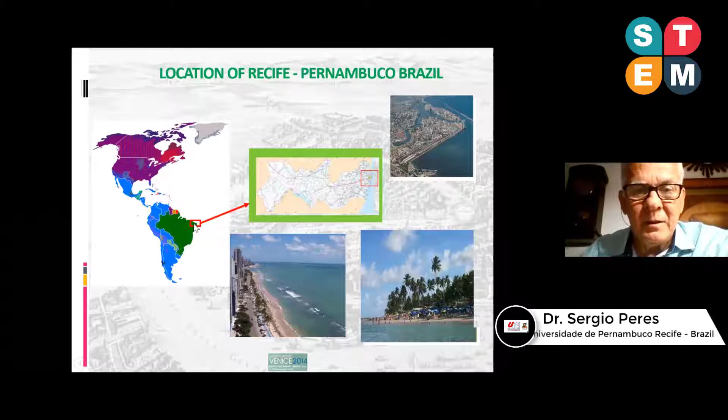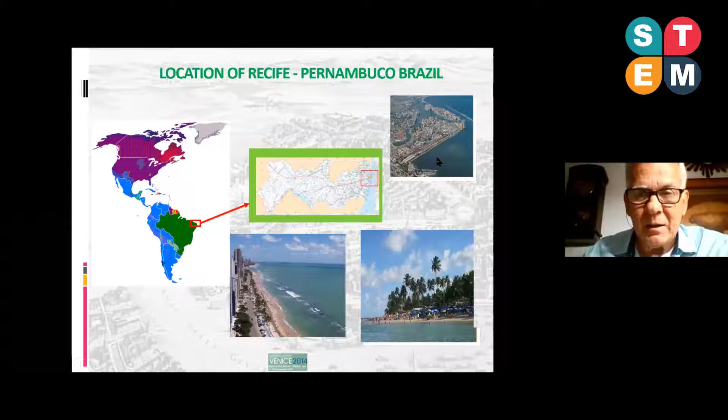All right, let's start then. I'm from Recife in Brazil, just so you know where I live. That's the Americas, and this point here is the Brazilian tip, where I live, in a state called Pernambuco, and that's my city. The city was colonized by the Dutch for 24 years, and after the Dutch left Recife following a war with the Portuguese, they went to New York and settled there. New York was founded after Recife, through Recife, I would say. So that's our city and our beaches, just for you to know.

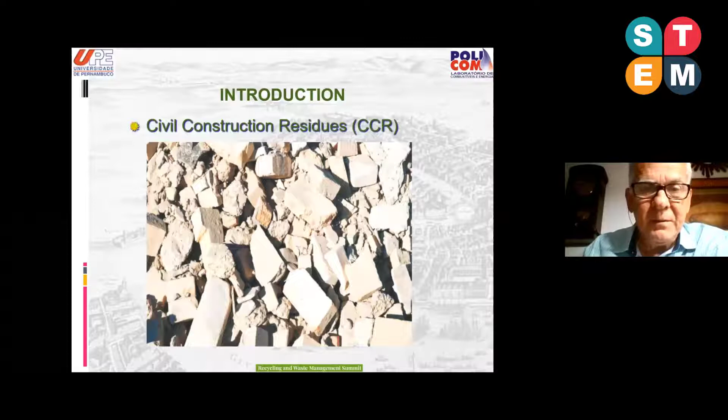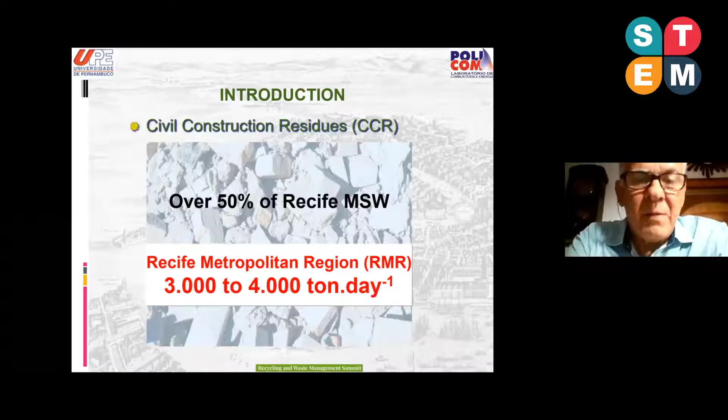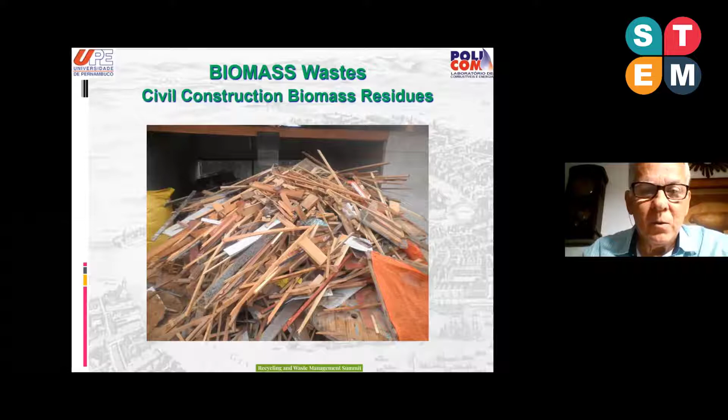Here we have the civil construction residues in Brazil. Over 50% of Recife municipal solid waste comes from civil construction residues. In the metropolitan area, there are about 3,000 to 4,000 tons a day, and part of it is wood. The waste wood accounts for 6% of all civil construction residues. In Recife, that would be around 200 tons a day, and it cannot be reused because it's broken or damaged and cannot be used in civil construction anymore.

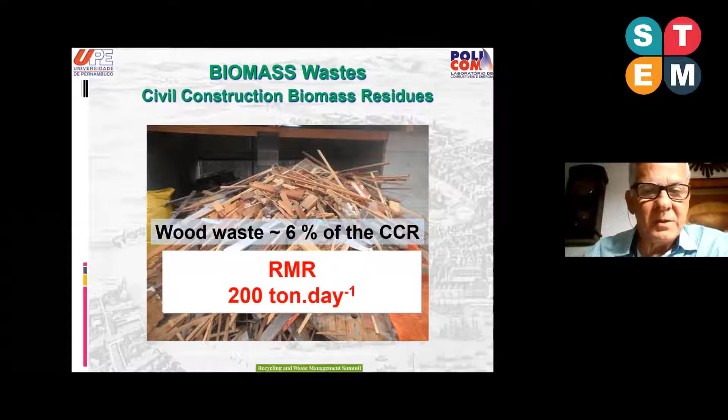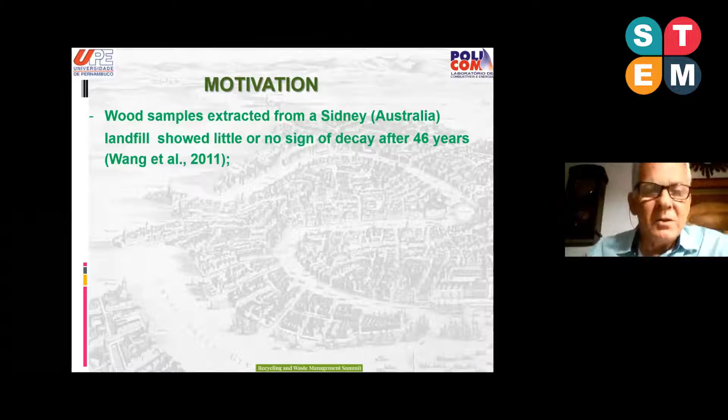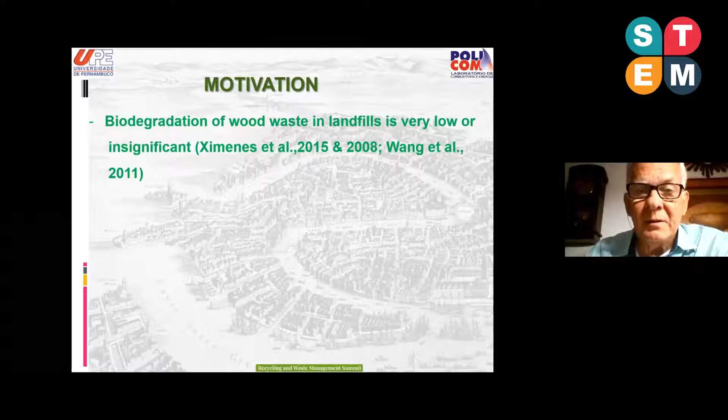So what do they do with that? In Brazil, most civil construction wood waste is dumped in landfills or open dumps. One problem is that wood samples extracted from a Sydney, Australia landfill showed little or no sign of decay after 46 years. The biodegradation of wood waste in landfills is very low or insignificant, because lignin, one of the main constituents of the cell wall, prevents microbial attack in the cell wall composition.

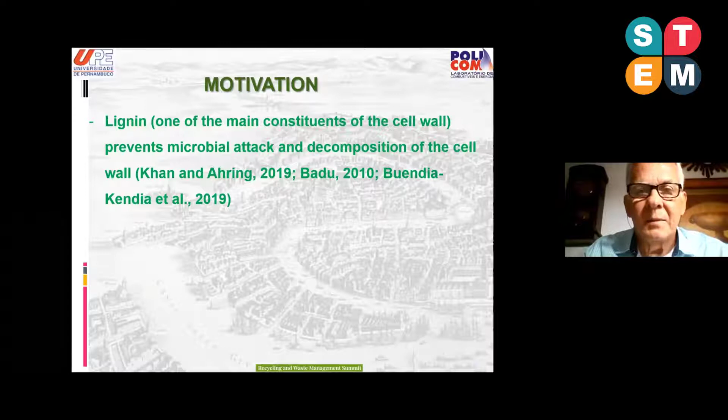And for this case, the amount of wood waste in landfills is very, very high, and that reduces the lifetime of the landfill. For this reason, environmentally friendly technological routes ought to be investigated to use waste wood as feedstock.

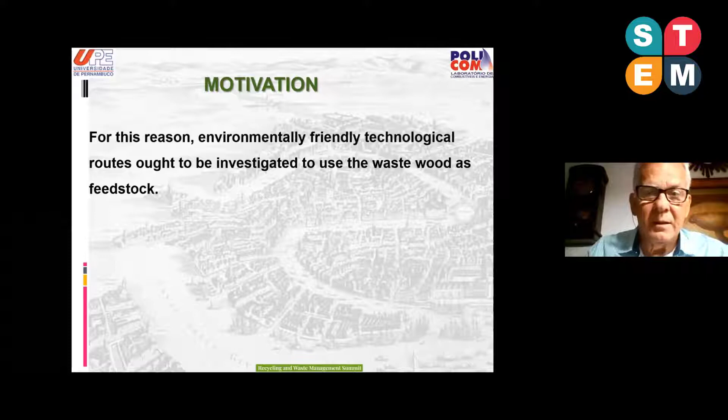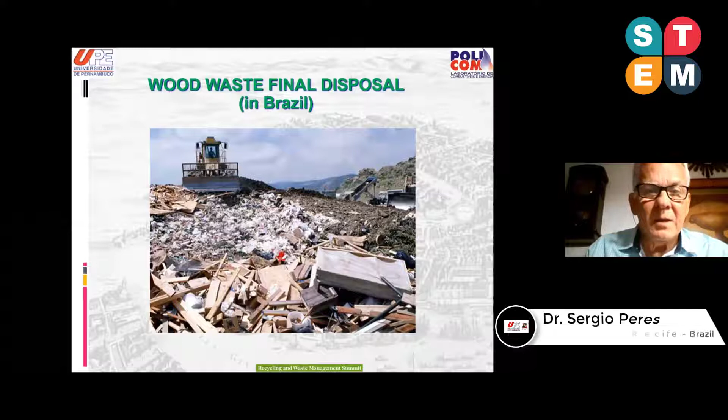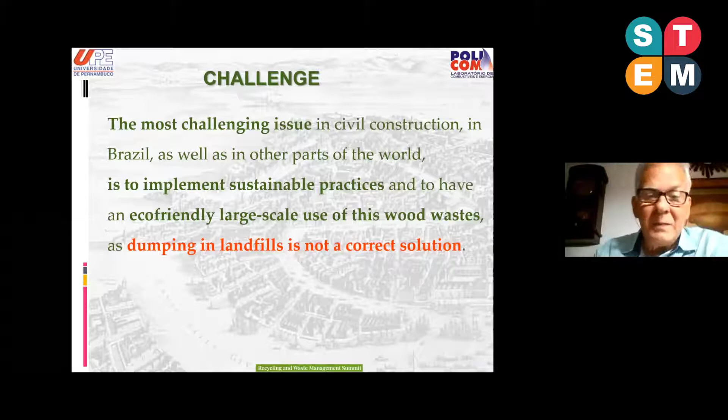So that's the wood waste final disposal in Brazil. As you can see, some is left in open dumps at construction sites, some is left in the streets, and some goes to sanitary landfill. That's a burden because it cannot degrade in due time. So the most challenging issue in civil construction in Brazil, as well as in other parts of the world, is to implement sustainable practices and an eco-friendly, large-scale use of wood waste, as we know dumping in landfills is not a correct solution.

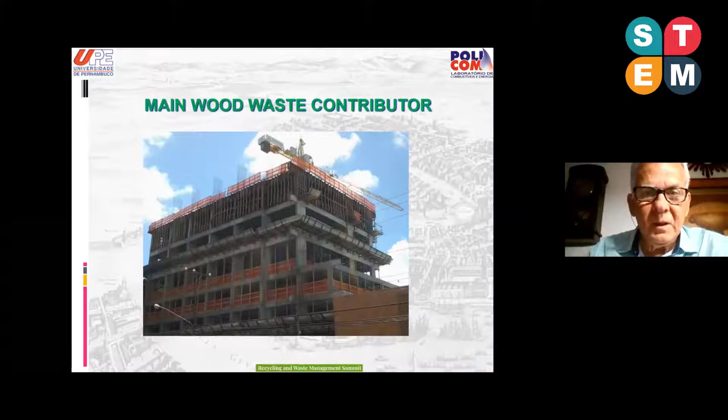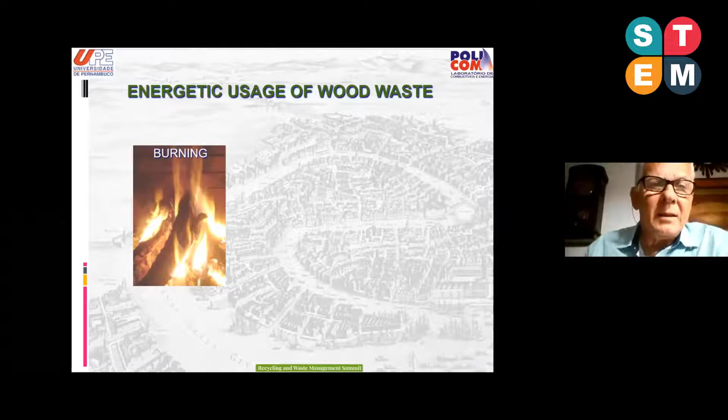In our research, we collect the wood waste from residential buildings - I'll show the details in a few minutes. Then there's the energetic use of wood waste, which can be combustion or burning, used in bakeries, home heating, boilers, steam generators, or red tile factories. So there's a lot of potential use, but some of it cannot be sold, and there's currently no recycling or energetic use of the wood waste.

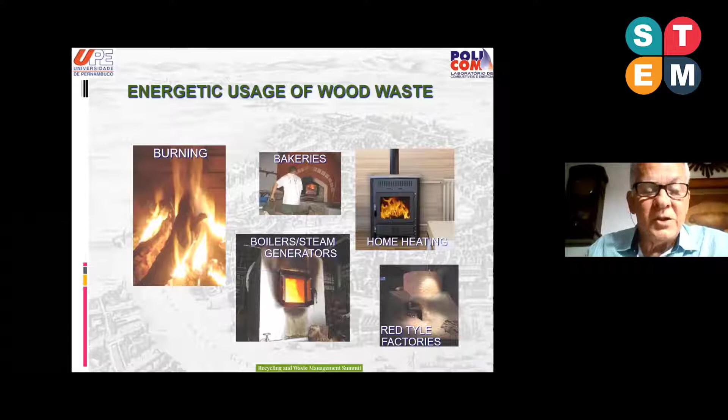So the objectives of this work are to obtain data on the wood waste composition and availability in a construction site, to determine the physical, chemical, and energetic characteristics of the wood waste, to evaluate its usage as solid fuel for direct burning, and the use of wood waste as feedstock for gaseous fuel production using a bench-scale gasifier and a 20 kilowatt downdraft gasifier connected to an adapted Otto cycle motor generator.

In this case here, we are just going to show the results of the bench-scale gasifier, and also show, if it were used as a solid fuel, what would be the amount of energy that can be extracted from the wood waste.

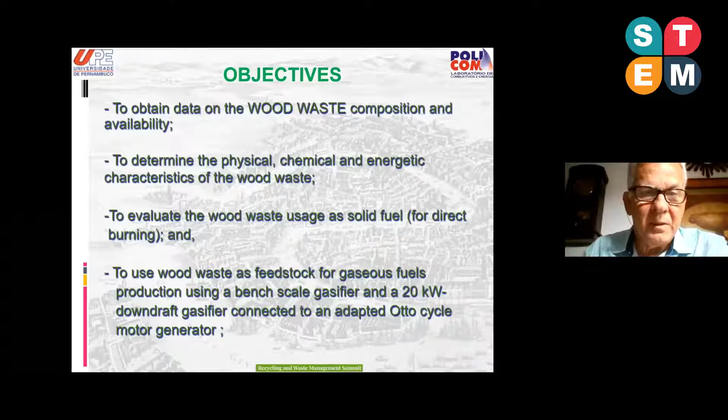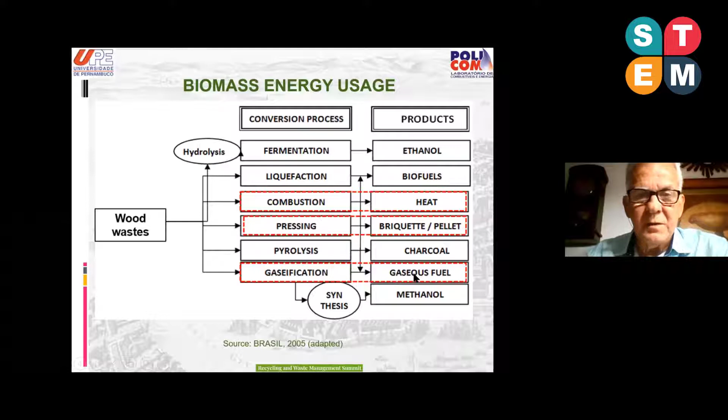So we're going to be talking about combustion - you have pellets and briquettes - but our approach is in gasification to produce gaseous fuels, which we're going to show you now. The three steps used were: sampling and preparation, characterization of the samples, and then production and characterization of the gaseous fuels.

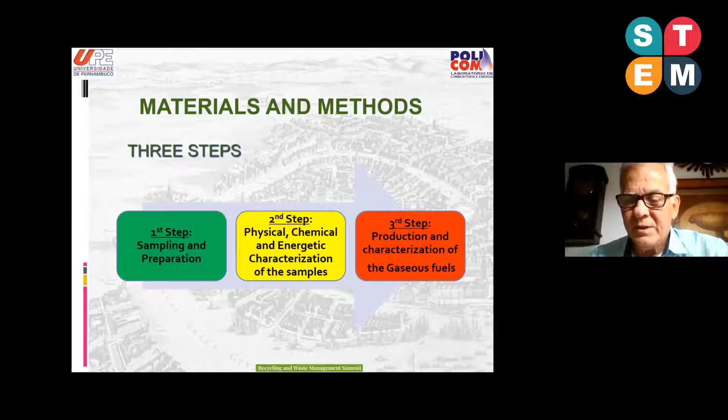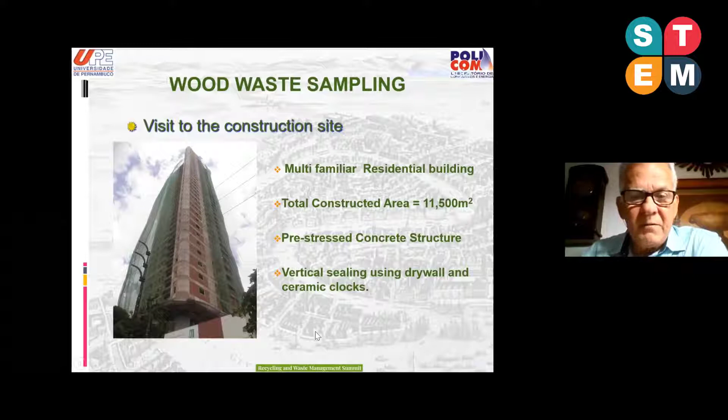The wood waste sampling was done at a construction site using multi-family residential buildings, which is very common here in Recife, Brazil. The total construction area was 11,500 square meters, using pre-stressed concrete structure, with vertical sealing using drywall and ceramic blocks.

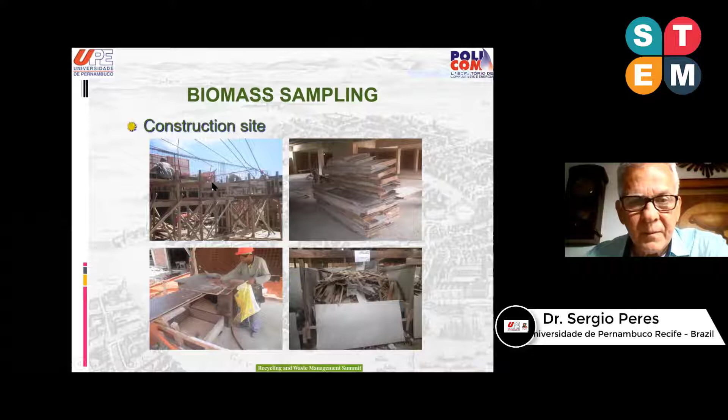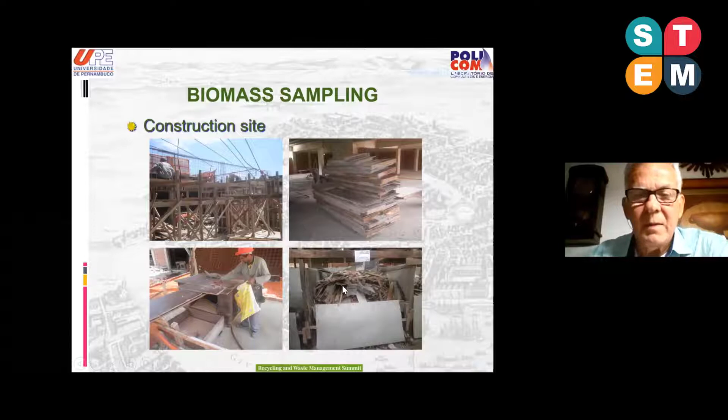That's the construction site in various phases of construction, and that's where they use the wood. Some of it can no longer be used, so you can see here plywood, and that's the residues - the waste management you can have at construction sites.

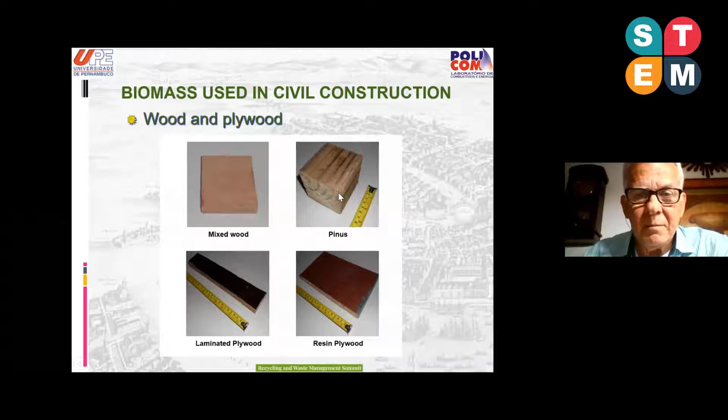When we got the samples and did the gravimetric analysis, we found four main types of wood used in construction here in Brazil: mixed wood, which is made of many types of wood, pinus, laminated plywood, and resin plywood.

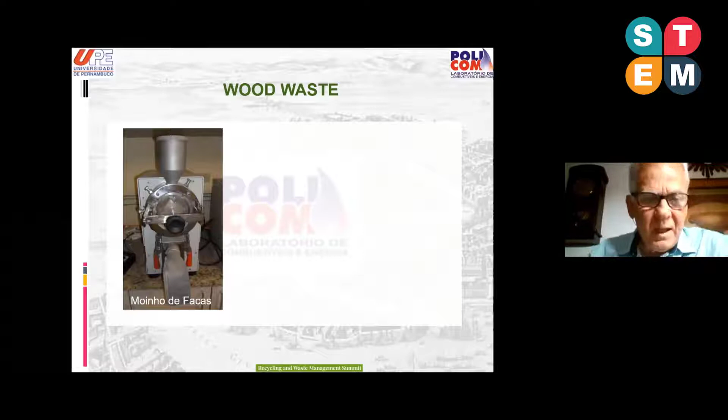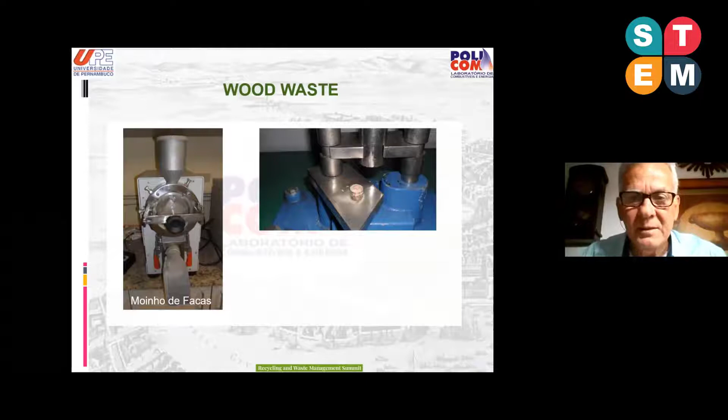So here's how you prepare the samples. You have a knife mill, and then you get the sawdust and prepare the pellets. The pellets can be used to analyze in our instruments in the lab.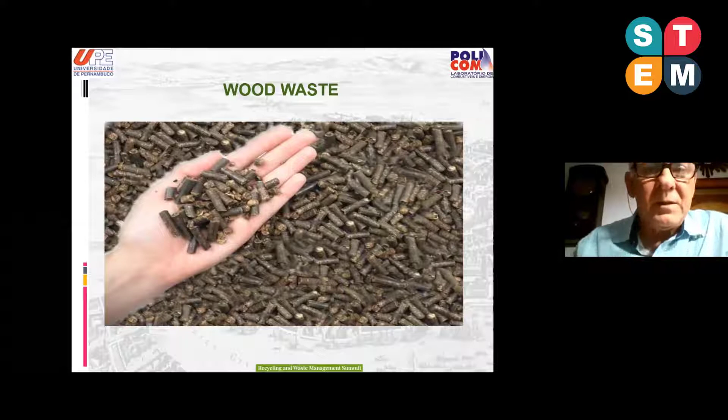That's our small pelletizer - that's the wood waste that could be in form of pellets. Instead of having the big plywood and timbers, you reduce that and produce this kind of pellet that can be sold already as solid fuel for heating, for bakeries, and all this stuff as solid wood. That's how you use it for our experiments.

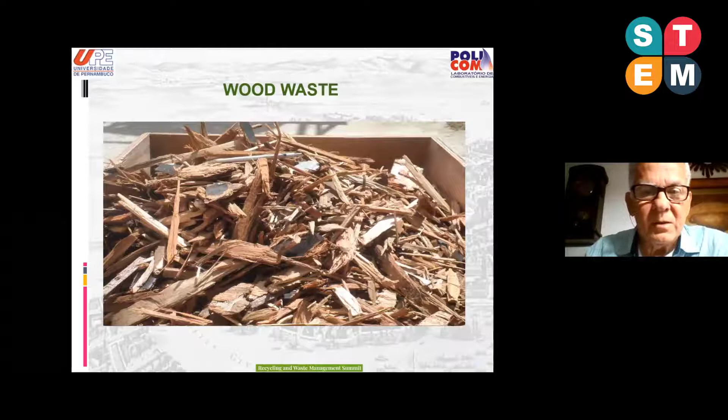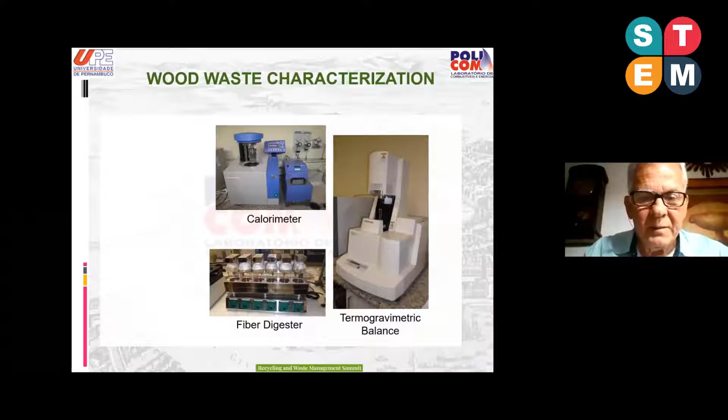So that's the wood waste - it's shipped here, goes through the mill, and then in the lab we have the instruments that do all the analysis: a calorimeter, a thermogravimetric balance for the proximate analysis, digestion to get the biomass composition, and elemental analysis to verify the composition of carbon, hydrogen, oxygen, nitrogen, and sulfur.

And that's the GC, the gas chromatograph, used to analyze the composition of the gases that come out from the gasifier. That's a downdraft gasifier in pilot scale, a 20 kilowatt unit, and that's the bench scale gasifier we use in the lab - the one we're going to show results from in our research.

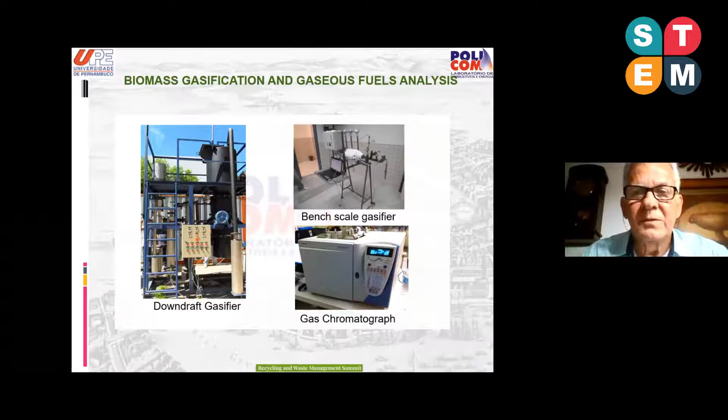So that's the bench scale gasifier. There's a gasifier tube made of stainless steel, and here we have the heater. And here we have the thermocouples in order to verify the temperature inside the reactor. Here you have the valve.

That valve there, you pass nitrogen first to have an inert atmosphere. They have all these valves here, and a pressure gauge. With this pressure gauge you can verify the temperature and pressure achieved inside the chamber, and use that to control temperature, pressure, and residence time.

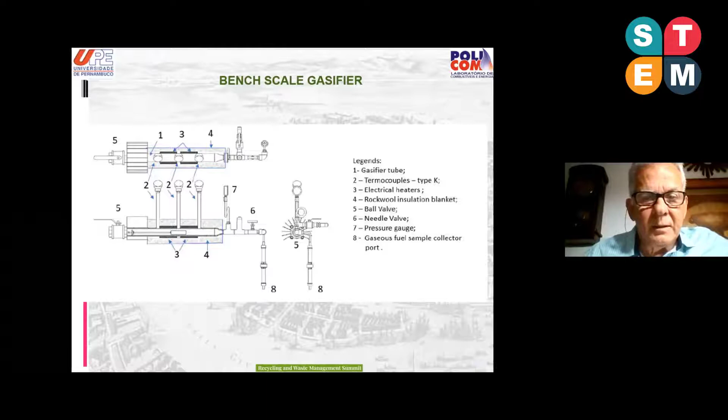So when you open the gate here, you get this sampler collector port, and after that the gases go to be analyzed in the GC.

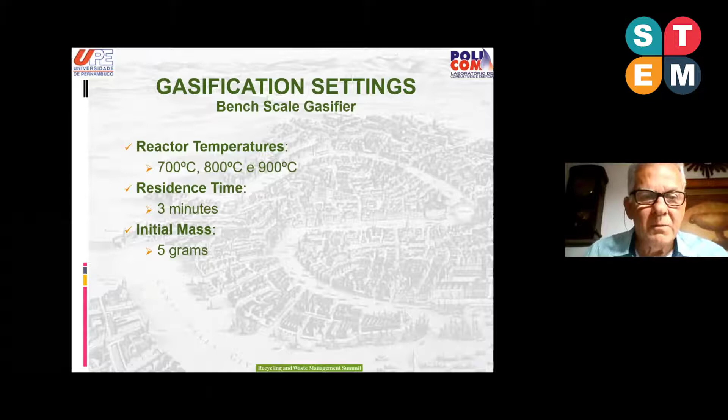For the bench scale gasifier, the analysis was done at temperatures of 700, 800, and 900 degrees Celsius. The residence time was 3 minutes, though we tested different residence times from 1 to 6 minutes and the results after 3 minutes were the same, so we established 3 minutes as the standard. The initial sample mass used was 5 grams.

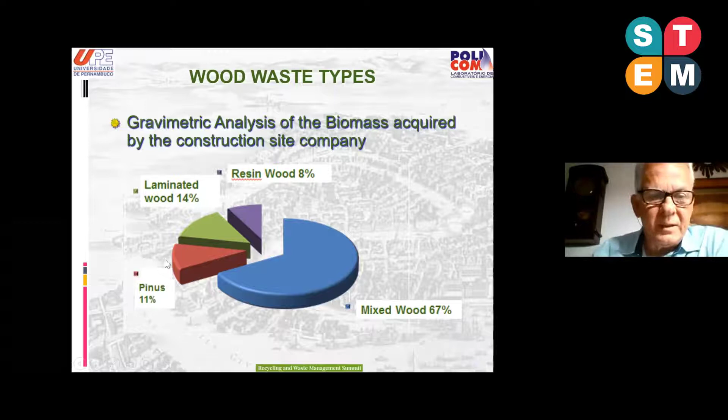For results and discussion: in civil construction in Brazil, the types of wood used were mixed wood at 67% of purchases, laminated wood 14%, pinus 11%, and resin wood 8%. From the total amount purchased, it was 164 tons - that's the percentage of each type bought for the construction of the residential building.

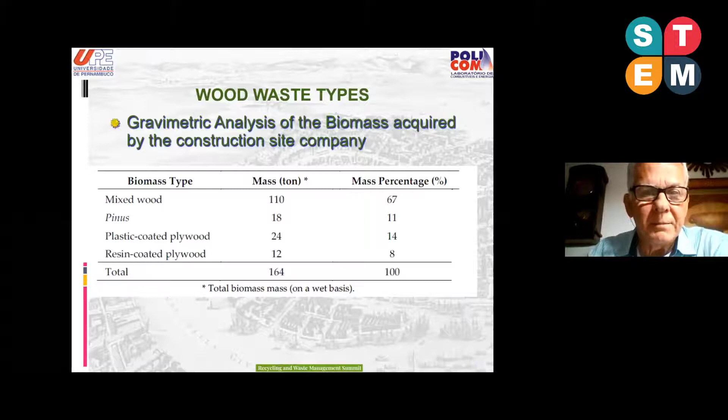The proximate analysis has shown these results: density for mixed wood was 800 kilograms per cubic meter, pinus 414, plastic coated plywood 519, and resin coated 521. Moisture content was very low, 7.6 to 10%. Ash content was very good.

That experiment was done at 600 degrees Celsius using the muffle method, and also using the thermogravimetric balance to get results. You can see that the amount of ash was very low, and the weighted average considering the percentage of each wood type was 1.29 - very low for gasification.

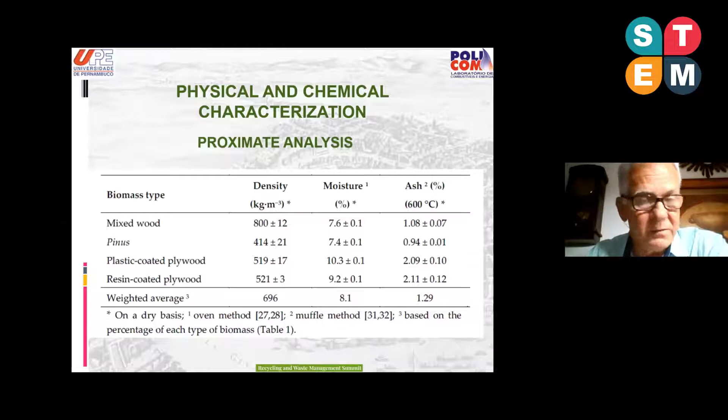The ultimate analysis shows that the composition of the biomass was almost the same, with very little variation. The weighted average was 46.6 for carbon, 6.58 for hydrogen, 45.34 for oxygen, 0.17 for nitrogen, and 0.18 for sulfur.

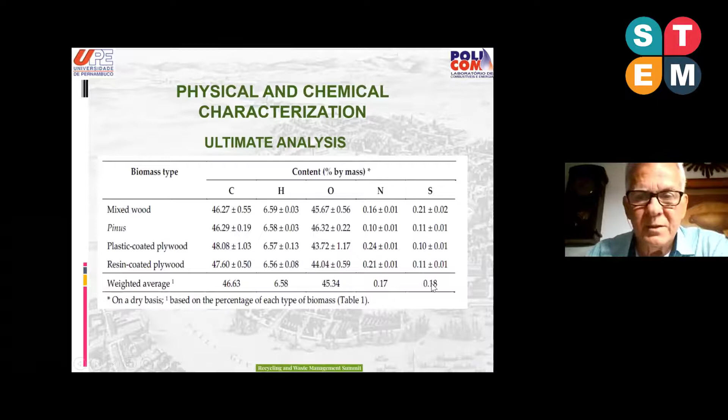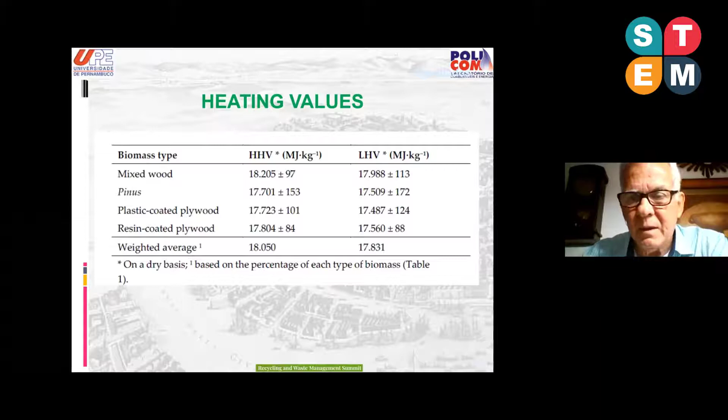That's very small because sulfur has to be under 1%. The heating values were very high. The low heating value was in the range of 17 megajoules per kilo, and the average was 17.8, on a dry basis.

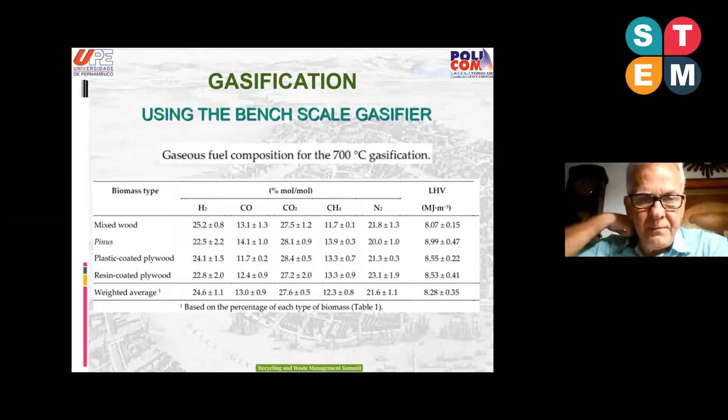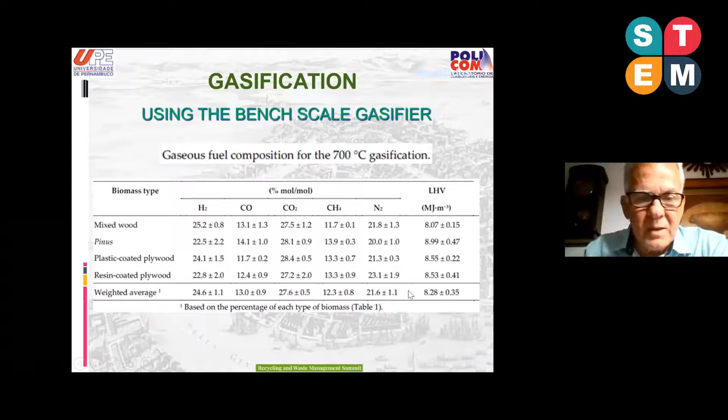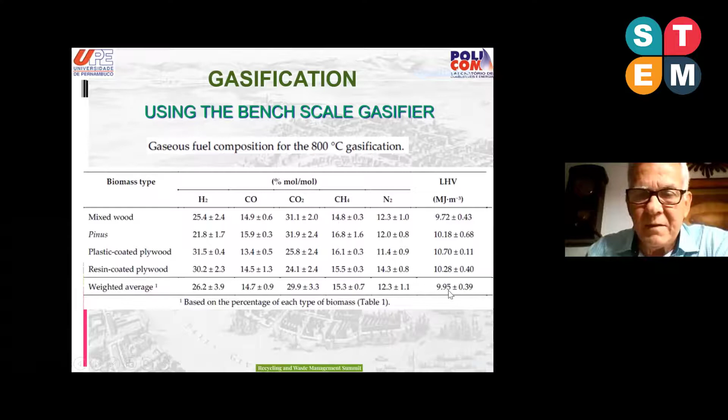They started having a better low heating value, varying from 9.72 to 10.7, with an average of 9.95. For 900, the average was 10.14. The low heating value varied almost to 10, in the 10 megajoules per cubic meter range.

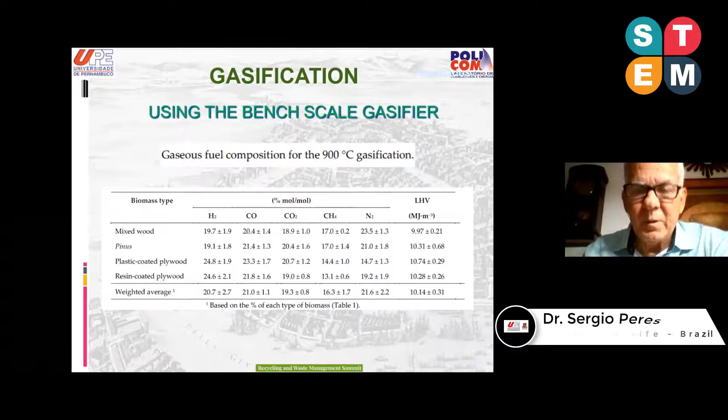Another thing you could verify here was the effect of gasification temperature on the low heating values for gaseous fuels. You get the composition and heating value for each gas, and we weighted them. From 700, that was in the 8 megajoules range. When we increased the temperature to 800 and 900, there was a very good improvement.

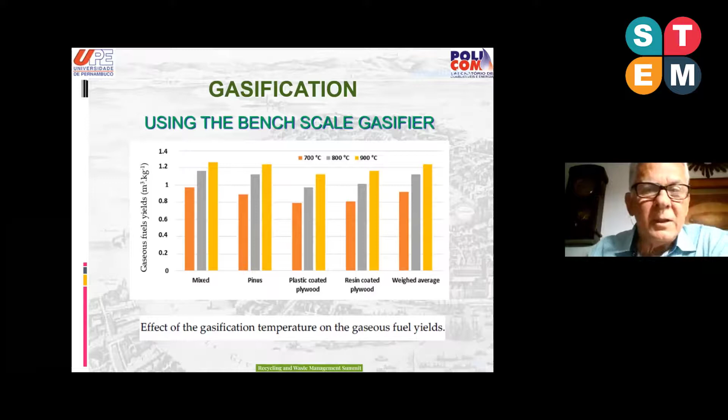Another thing you have to take into account is the gas yield, in cubic meters per kilo. You could verify that the yield increased as the temperature increased. And when we multiply the yield by the heating value, you can get the energy that can come out from the gasification process.

The total energy produced, in megajoules per kilo, was much higher at 900 than with the others. Even though the low heating value was about the same for 800 and 900, the production of gases was higher, which makes the 900 degree experiments more attractive than 800 for all of them.

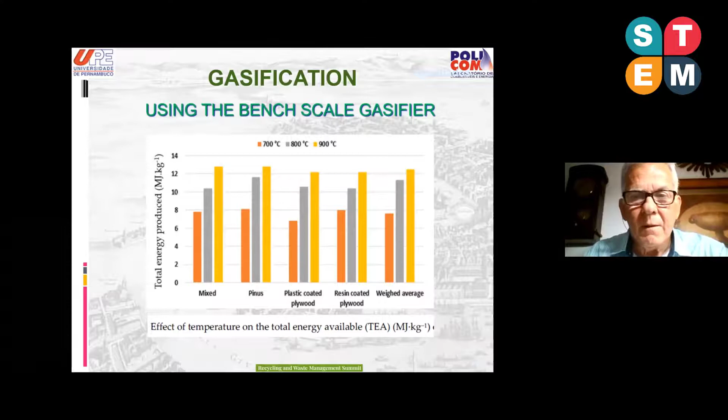So if you consider 200 tons of wood waste, instead of being dumped every day in Recife in landfills, they can be used for power production. They would generate like 6,400 megawatt hours per month.

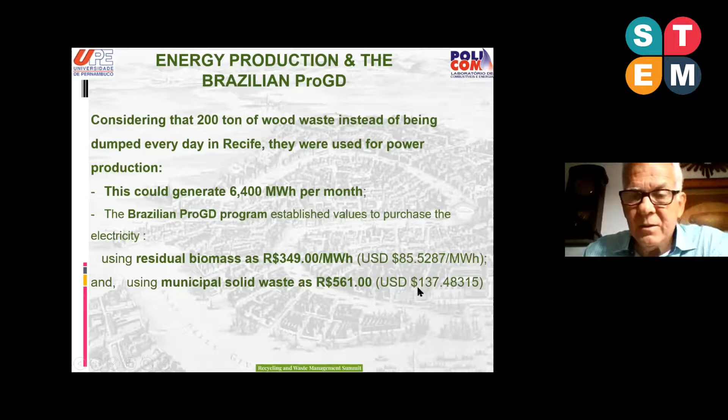There is a Brazilian ProGD program, meaning distributed generation for electricity, that established values to purchase electricity using residual biomass at $85.52 per megawatt hour. If this is used instead of being dumped in a landfill, you can get like 561 reais, that means 137 US dollars per megawatt hour.

This revenue may attract power and civil construction companies to invest in this technology to produce electricity locally. In that way, it will be a good way to produce your own energy and make revenue from this.

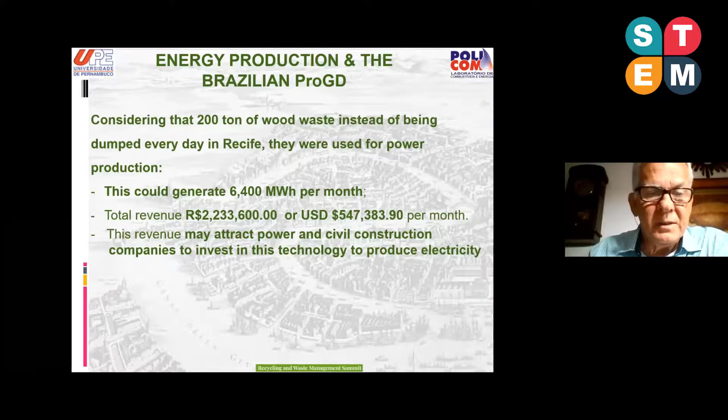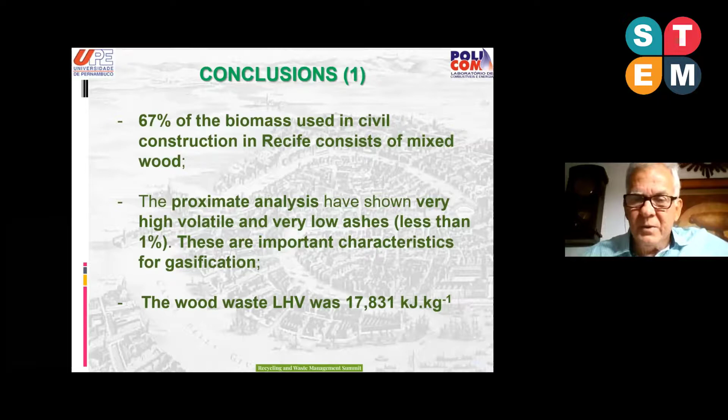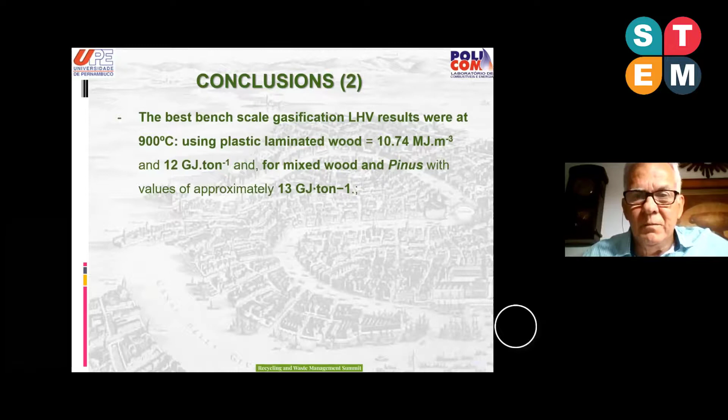The wood waste low heating value was 17.8 megajoules per kilo. The best results were at 900 degrees, generating 12 gigajoules per ton. For plastic laminated wood and for mixed wood and pinus, it was approximately 13 gigajoules per ton. All the wood waste produced daily in Recife, used for electricity generation through gasification, would produce...

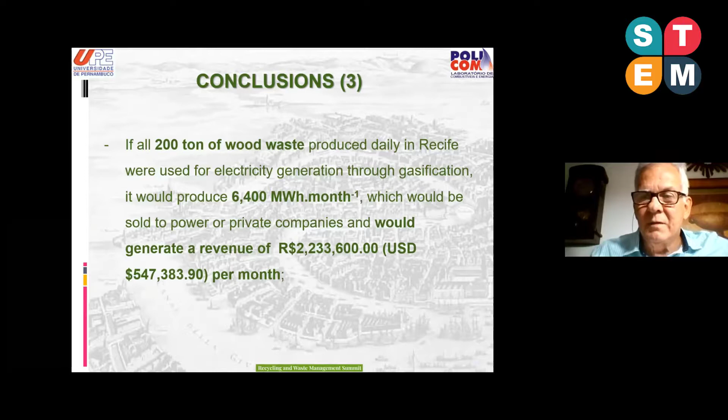6,400 megawatt hours per month, and this revenue can be like 547,383 dollars per month. This is a significant amount of money that could attract investors to use this kind of technology, so instead of dumping, you can use it to produce electricity.

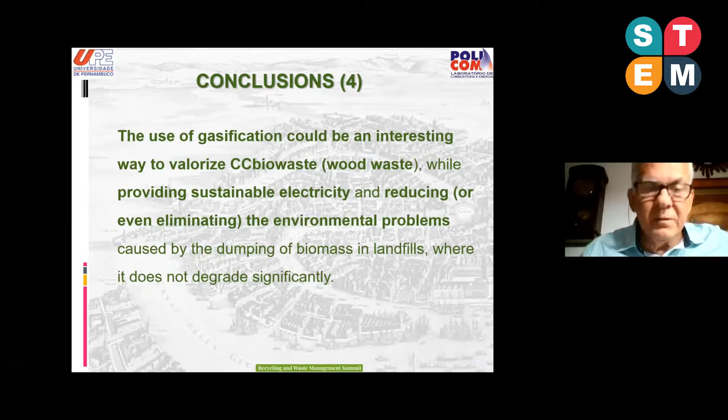So it's a waste to energy program. The use of gasification would be an interesting way to valorize the wood waste while providing sustainable electricity and reducing or even eliminating the environmental problems caused by dumping biomass in landfills, where it does not degrade significantly, as I showed.